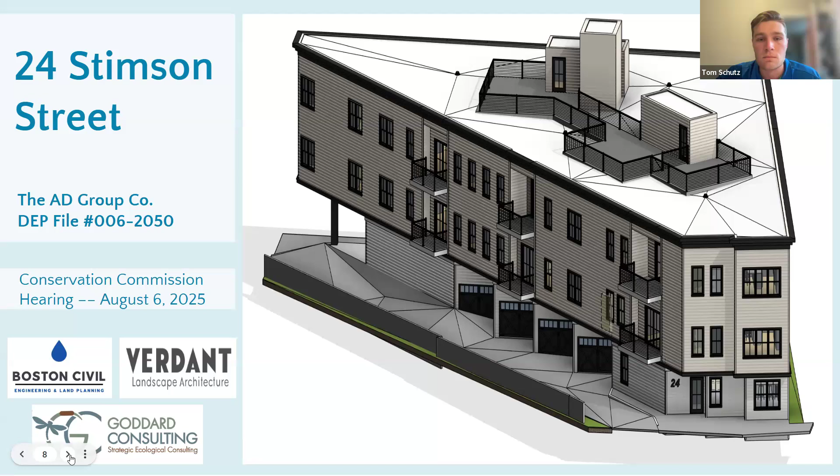Awesome, I think we can go to the next slide. Just a brief agenda here. So we'll start with some existing conditions, look at an ortho photo, describe the area, then we'll move into proposed conditions, the landscape plan, the building footprint and how it's evolved over time through several boards we've gone through. We'll look at the civil plans, the shadow study, and then close it up with any questions or follow-up discussion.

So here we're looking at an ortho photo of the locus site. The property boundary is highlighted in red.

This is a fully undeveloped lot that we're looking at, currently forested with mostly invasive trees consisting of Norway maple, and there's also a lot of invasive shrubs such as buckthorn and burning bush out there. It's bordered by commercial property and a parking lot to the west, residential properties to the north, condominium properties to the east, and then an isolated vegetated wetland to the south in an undeveloped lot.

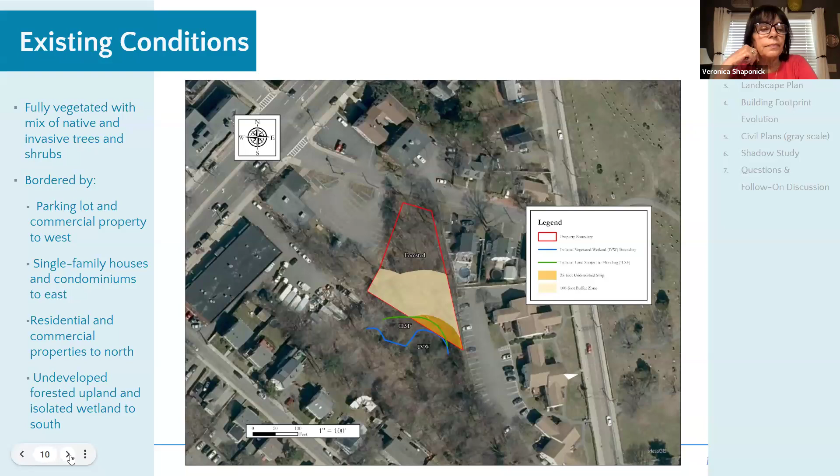So the existing wetland conditions on site consist of an isolated vegetated wetland, shown in the blue color. It inches its way onto the southern portion of the property, and it casts the 100-foot buffer zone, shown in tan, onto the locus site.

This buffer zone is only jurisdictional under the Boston Wetland Ordinance, and that would be the same for the isolated wetland. We're also going to have a 25-foot strip, which we'll see in the proposed conditions, that's going to be undisturbed.

The only Massachusetts Wetlands Protection Act jurisdictional resource area on the site is the isolated land subject to flooding, shown in the green line color, protruding onto the southern property boundary into that 25-foot zone. It's not located within any estimated or priority habitat for rare wildlife, not within an ACEC, outstanding resource water area, or a FEMA flood zone, and there are no certified or potential vernal pools on the locus site.

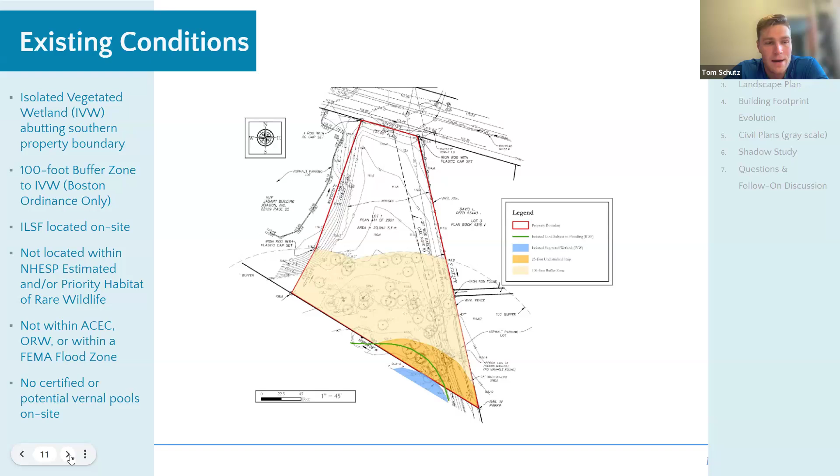We also have a tree survey for the commission. This was stamped and completed and submitted as part of the application. It's for the buffer zone only, as that is the only jurisdictional area for this commission. The trees that will be removed are noted on the site plan, and then also some additional trees within that 25-foot undisturbed strip are noted. Isolated wetland is shown down there to the south, and then Stimson Street to the north.

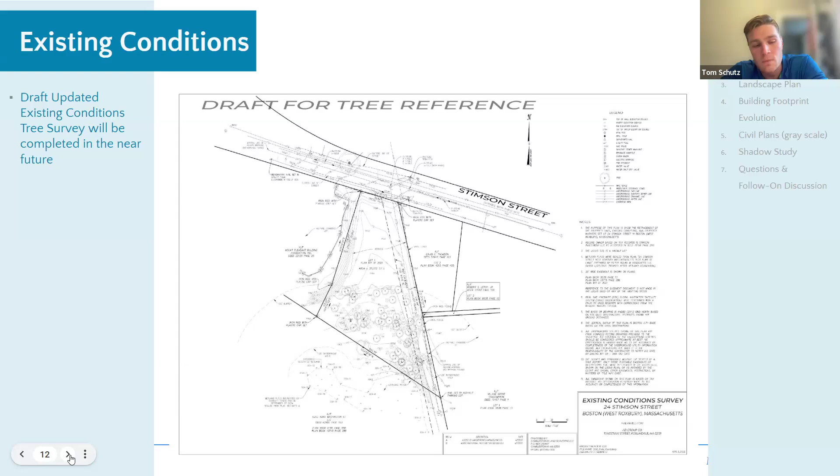So the applicant proposes the construction of an apartment building in the northwestern portion of the site, shown in the tan color, an associated access drive which will run down the eastern portion of the lot adjacent to the diagonal property boundary. It's also going to have a full stormwater management system which adheres to the stormwater management guidelines.

All the proposed work is within just the buffer zone to the isolated wetland. There's no work within 25 feet from the isolated wetland itself or within the isolated land subject to flooding.

As you can see, the tan is encompassing the bottom half of the proposed building and then also some of the parking, shown in the darker gray color. There's some spots you could see through the transparent tan color, but none of it is actually impacting the isolated wetland. We're also keeping that strip, the orange color, 25 feet from the wetland, to keep it undisturbed and forested to allow a natural buffer to that wetland itself.

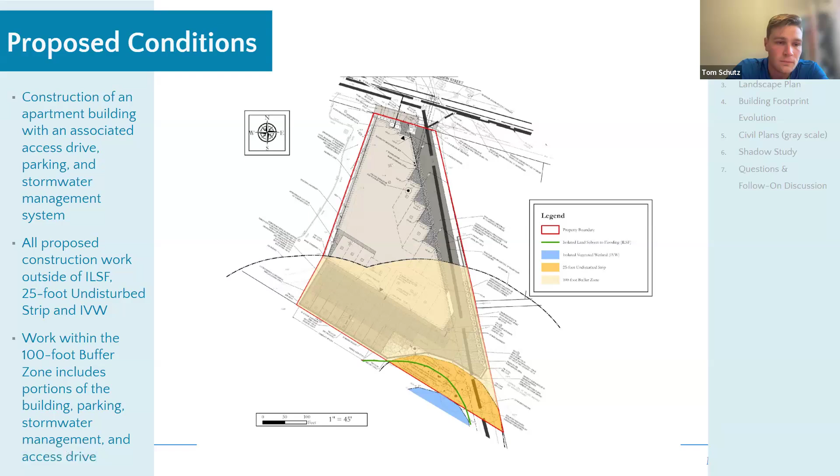This is showing the limit of work and where the actual construction pathway will take place. Access will be coming in from Stimson Street up where that hatch color is, and then down adjacent to it. The limit of work is shown in yellow on this site plan, and the limit of work is going to consist of filter sock, which is going to be secured with wooden stakes.

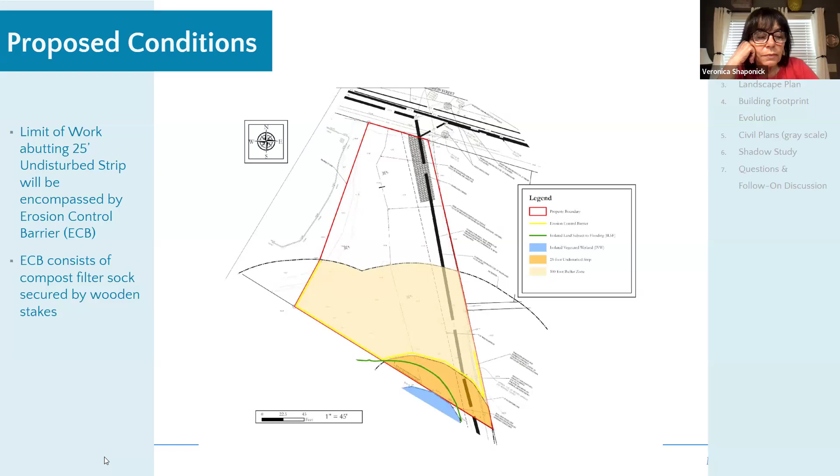Some more erosion related things. We have a stabilized construction entrance consisting of double washed stone. Again, our erosion control barriers consist of the compost filter sock with wooden stakes securing it in. The inlet for the stormwater management system is going to be protected with silt sacks, in the catch basins. And then there's also going to be a proposed sidewalk and driveway adjacent to the access drive.

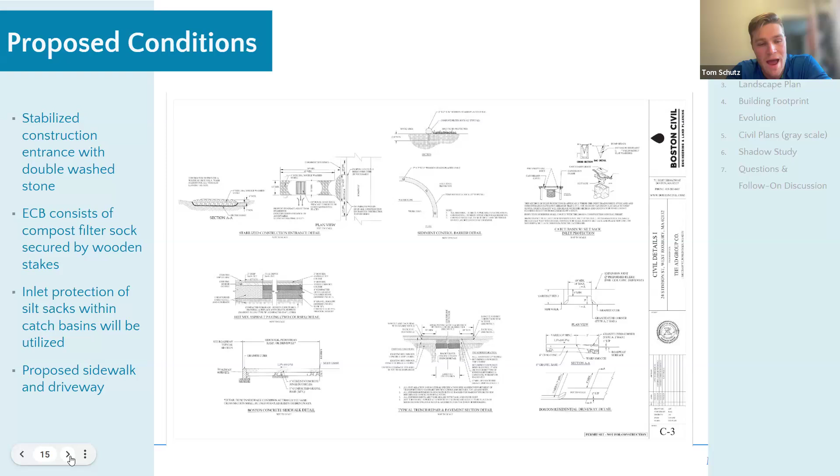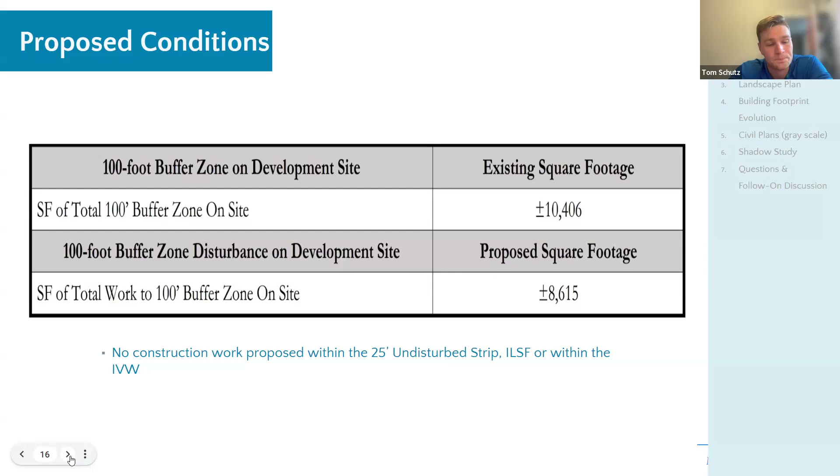I'll be turning over to Katya for the description of the landscaping plan. Thank you. Again, my name is Katya Podsiadlo with Verdant Landscape Architecture.

Landscape has pretty much three primary components. The top of the page on Stimson Street, we've developed a very welcoming front entry to the front door and lobby entrance for pedestrians. The entry would be highlighted with permeable pavers and flanked with durable varied plantings at the front door facing that Stimson Street.

Currently, there are no sidewalks on this side of Stimson Street, so we were proposing to add a public right-of-way, concrete paved sidewalk as well.

All the new fencing that we're proposing along this side and the rear property line, and outside the 25-foot resource area but on the retaining wall that I'll describe in a second, will be a metal picket fence.

Another thing to note, as was already described, is that the right-hand edge, or the eastern edge of the site, is the driveway access to the rear of the building where the parking is located. At that parking area in the rear, there's a turnaround in the right-hand corner colored green here, because it will be turf stone, with an image illustrating that style of permeable paver on the right that you can see. Next page, please.

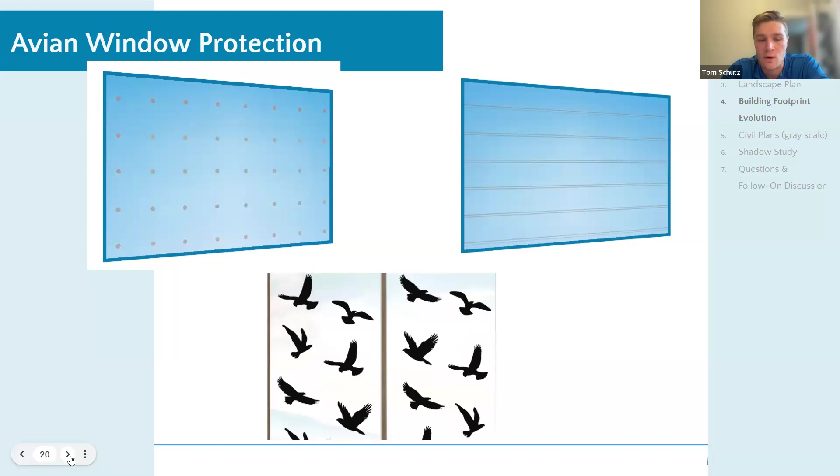All right, next slide.

Thank you. This is Eric Zackerson, architect for the project. Andres and the team asked me to give a little bit of a timeline of the different designs we've been through. The project was started in May 2022, and given its unique configuration, we immediately recognized the opportunity to design a project that would be zoning variance free, and we believed at the time it would be a rather quick and hopefully successful project.

We had a meeting with the BPDA in September 2022. There were 22 units shown, and 33 parking spaces. This was, as I said, a variance-free project. The BPDA asked us to make a few changes to increase the green space, and we met with them again in February 2023. We presented a project at that time that had 20 units and 30 parking spaces, again with no zoning variances.

The BPDA, as they were called at that time, asked us to take a step back and see if we could possibly take it down to 14 units and under 20,000 square feet, so that it would be taken out of the Article 80 process.

We were not given a great solid reason for that, but they were not comfortable with the number of parking spaces that the zoning code required.

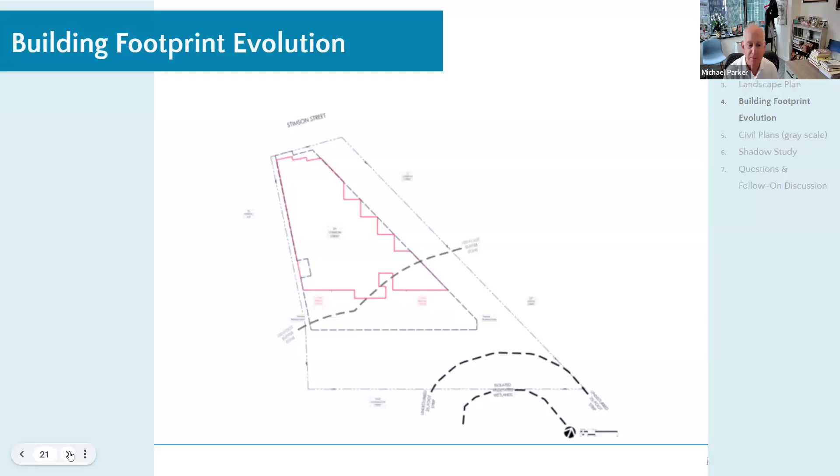Okay. That's very helpful. Who's next? Or is that it? Nope. There we go. I think you can actually jump to one more slide, yep, awesome.

Hi everyone, Kevin Queddy with Boston Civil. So this project, as described earlier, is just a wooded lot that we modeled in fair condition.

We had a time of concentration from a stormwater standpoint factored in because of the 3.5% grade over that length of travel. Additionally, to the west of the property there's a parking lot with a catch basin, but based on the topography going through there, we believe that may have overflowed or may not be in a condition that keeps the water on their property.

So essentially, what we did to address that, first off, was propose to improve the condition of that landscaping along there, to provide a swale, factoring a new sidewalk into the elevation of that swale. The remaining side of that swale would be an improvement to their property that the client is proposing to direct south, eventually making its way to the wetland.

From that point, that made the rate of runoff difficult to achieve. Because we're proposing to raise the grade at the back of the lot where that parking is, we're using 36 retained chambers that are concrete structures, utilized to raise the grade there, but also to prevent any lateral infiltration because those have concrete sidewalls.

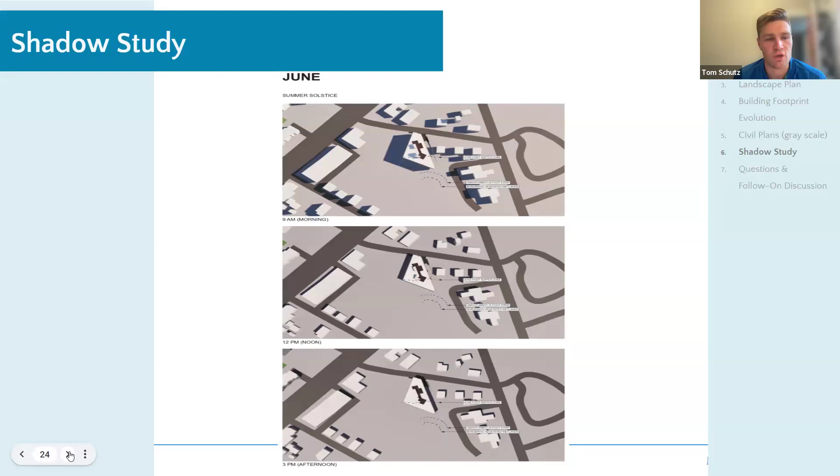Yeah, so we'll just finish up with the shadow study, as this was requested also on the site walk. These are just models of how the building is proposing and casting shadows onto the adjacent lots or onto the lot itself.

This you're looking at is June. This is the one time, at the 9 a.m. hour, where we're going to be casting a shadow towards the wetland itself. Every other shadow we see is going to be either contained on our lot or cast away from the wetland. The wetland is shown down there, you can see the two dotted lines. This is the one that is actually going to be casting towards it. So this is June, for anybody to note.

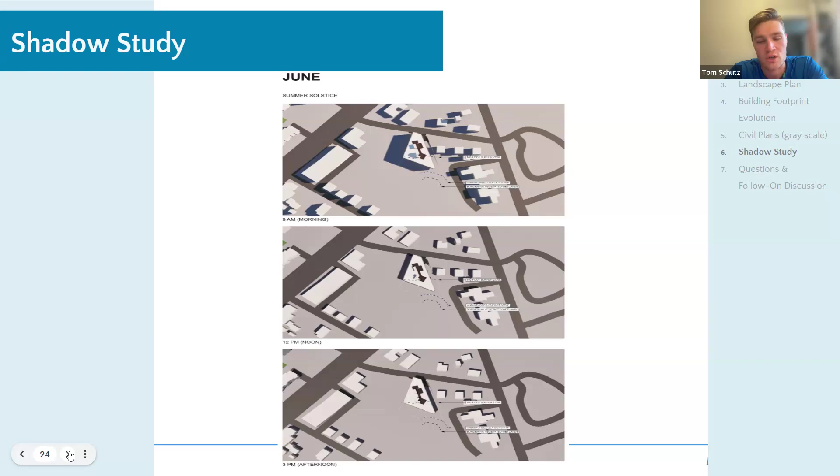Then we'll have two more slides that just show the next couple of months after that, through September and March, a longer shadow in the morning, but then pretty contained on our site through the rest of the day.

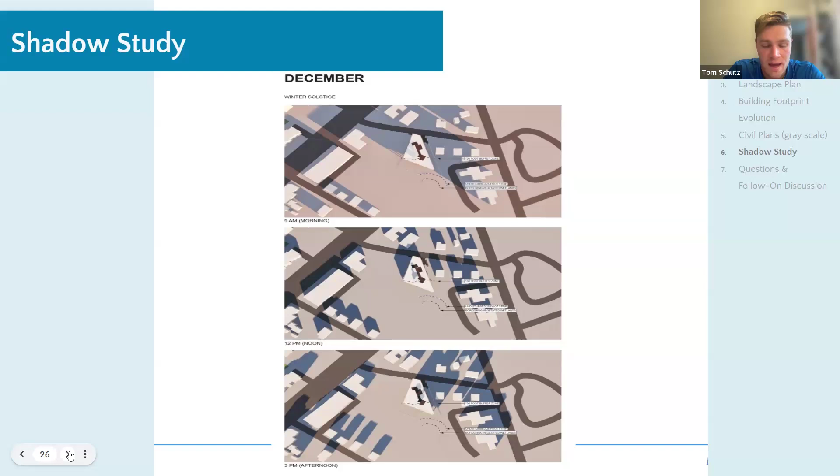All right, and now I'd like to open it up to the commission for any questions or comments for this project. Okay, great, thank you. So quite the odyssey there with the design of the building. And Andreas, you're probably happy you didn't live through all of those 3 years and you're just coming on board now. Certainly, Michael. I look stressed enough to have gone through all of that.

Okay, so I'm going to go to parking, and I know you've got your zoning attorney on the line here, and it sounds like a variance wasn't necessary. So I think we're going to be talking a lot about the parking and how close it is to the resource areas. Interesting that you didn't need a variance, and I guess the question is, if we wanted to get you to move those parking spaces further away from the resource areas, how would that get accomplished? And I would imagine that you don't want to accomplish that at the cost of getting a variance.

Yeah, that's correct. The only way it would be accomplished, moving the parking, would be eliminating the first unit and raising the building up. If we raise the building up, then now we trigger a zoning variance again. So we're kind of stuck between a rock and a hard place here.

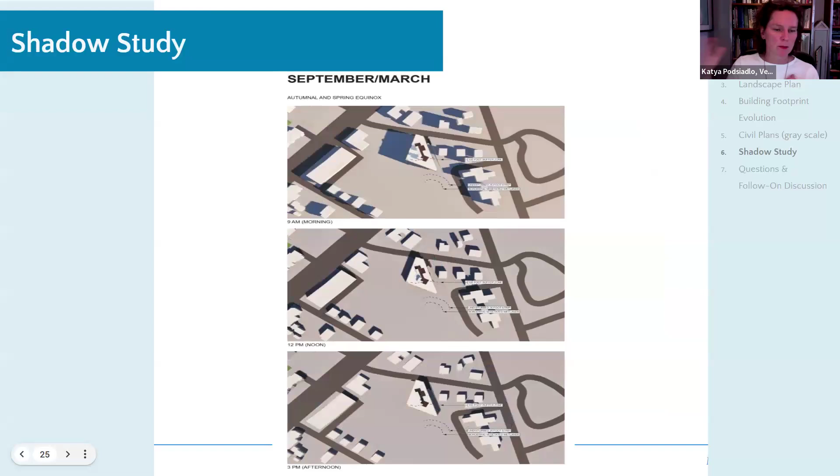Yeah, if we could bring up a plan, maybe there is a long strip of not-landscaped area along the driveway that's designated. At least on our landscape plan, we had pointed out snow storage, and I think it pairs up with the civil engineering plan. Along the right-hand side of the driveway, up until we show evergreen arborvitaes being planted, there's a strip that does not have landscaping, it's gravel. And then at the end of the site, in that little triangular landscape space where we are planting a tree, but with ground cover around it, we've labeled that as a snow storage area as well, as it can overflow if we can't fit it elsewhere.

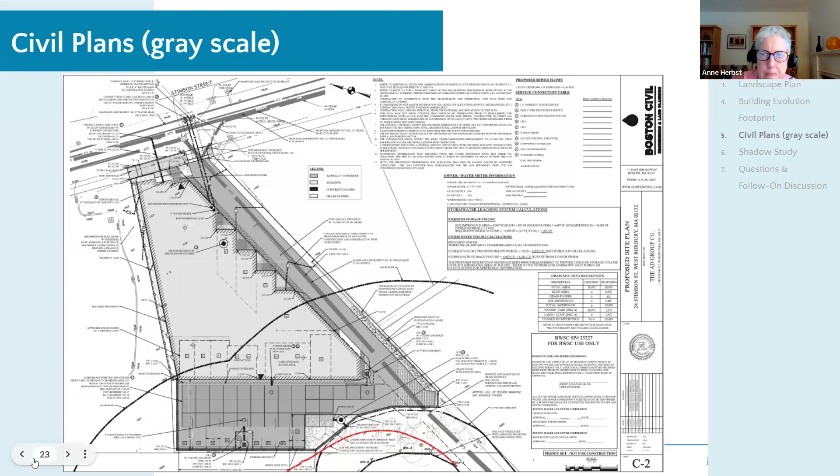But as described, there's also a place, a loading zone underneath, closer to the building. Could you show where the loading zone is? The landscaping plan actually illustrates it nicely. That would be helpful. Couple sheets before this, one more, two more there, one more before this. Might be the page right before this that has it labeled. There we go. I don't know how clear or high resolution this is, but there are some notes on it that point out snow storage along the right-hand side of the driveway.

Could I ask about that? How wide is that strip where you're wanting to store snow? About 4 feet, I believe.

I guess I just wonder about the practicality of that. I've never seen a strip like that suggested for snow storage. How would you even be able to move a truck sideways to put snow there? With the angled plow, for small events, storms, I believe, all events would just plow it off the side. But for dumping, like an actual excavator truck, the larger piles would be stored elsewhere.

And the elsewhere - there's a striped zone at the bottom right-hand corner of the building, to the right of those ADA parking spaces. There's another striped zone, that's a loading zone, and we could pile it up there. Below that, where our new light green tree circle is shown, there are ground covers in front of that tree that are low and can withstand snow storage being on top of them.

Is your loading zone where the trash is going to come out? No, that'll come out the side of the triangle. Okay, yeah.

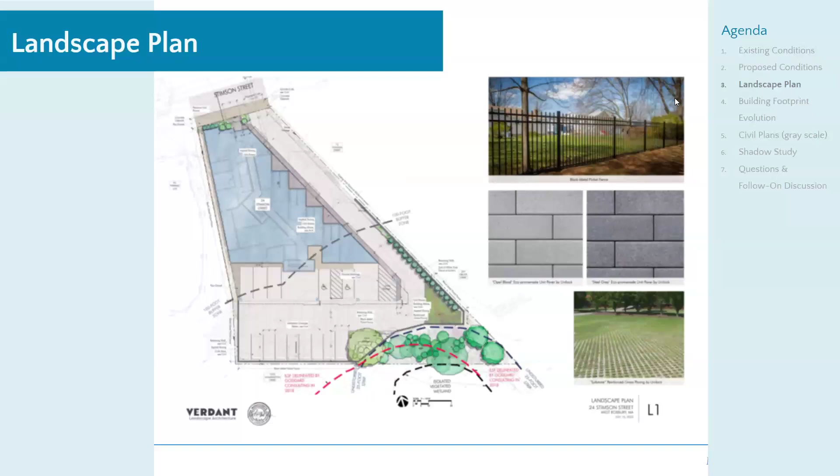Commissioner Shaponick, on here? Okay, I don't think I have more questions at this point.

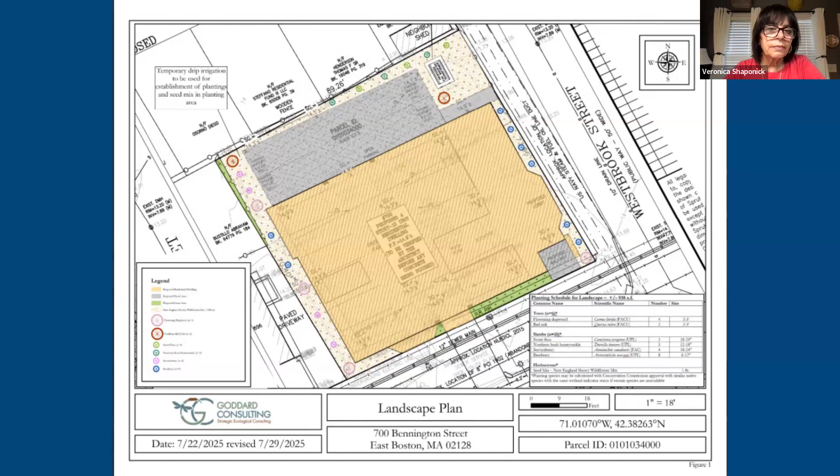I missed the previous presentation on this one. Just curious about the wildflower mix, what's the difference between that and the conservation mix? The wildflower mix is going to add more of the showy wildflowers you'd expect to see in a decorative area, but still native to New England, while the conservation seed mix is more grassy stuff. I see, great, thank you.

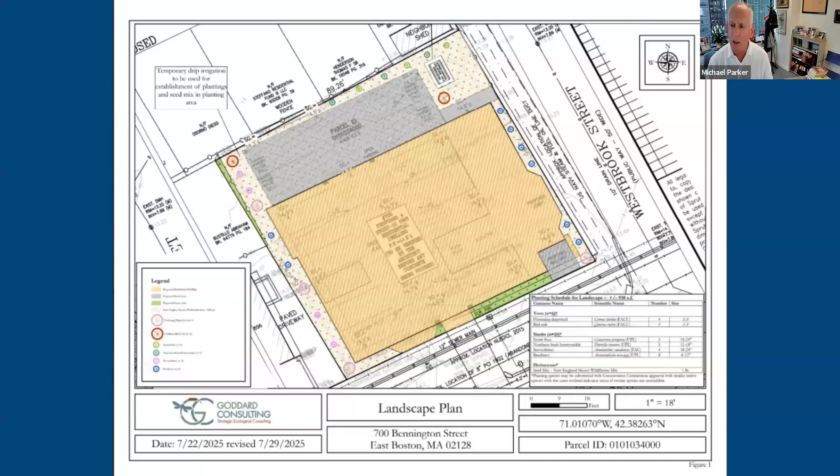On the flood vents, if they're required, it's something required on each wall, so at this point I don't see a need for a special condition. The applicant believes it's not required. If ISD in the end disagrees, then there will be flood vents. So I think my choice would be to leave it at that.

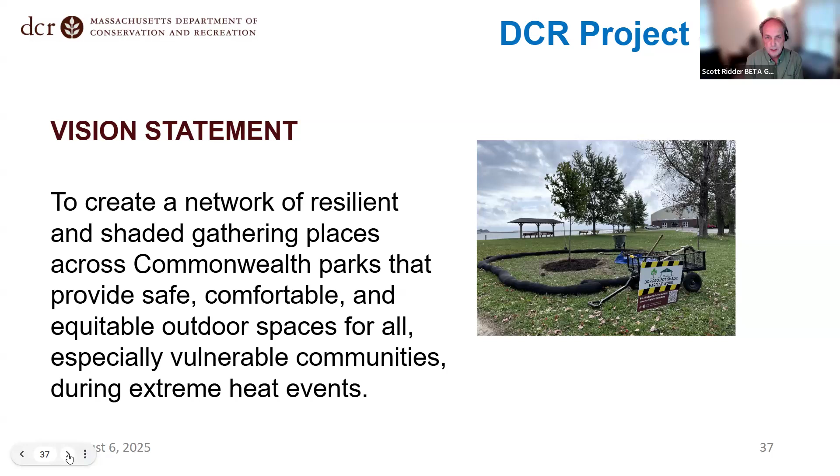This is one of the initial demonstration projects in the Boston area, which is pretty great. This picture shows that DCR has a great partnership with Tree Eastie, a volunteer urban forestry group. Last year they planted about 25 trees at this particular site, and this October they're going to plant another 25 or so as part of this project, which is one reason why we're here tonight. Next slide, please.

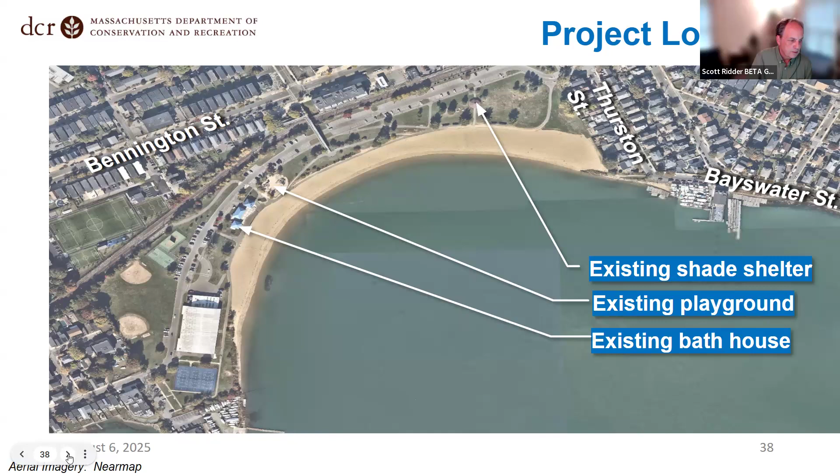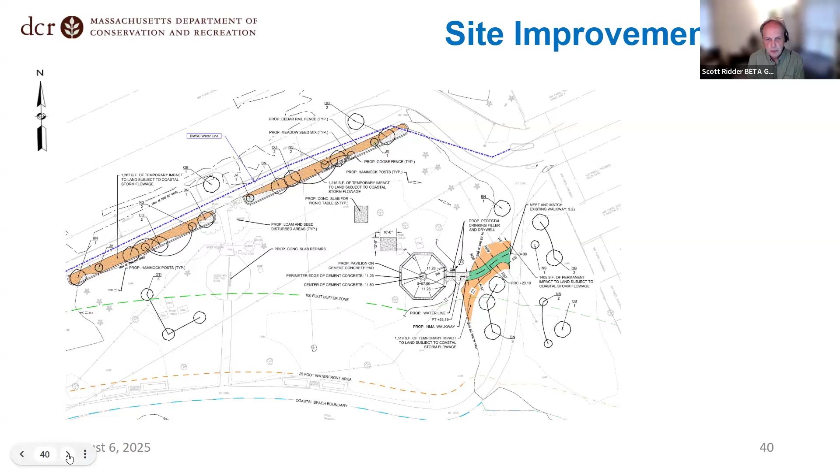Other opportunities for improving the site for park users, we're providing a couple additional new ADA accessible picnic tables. We're also doing some hammock posts. And again, all of this work is outside the buffer zone. We will be doing some tree planting within the buffer zone, and Elise can maybe talk about that now while we're on this slide.

Definitely, this slide is a good slide to show. So the project will involve work within land subject to coastal storm flowage, which is the coastal floodplain at the site, as well as work within the 100-foot buffer zone. So I can walk everybody through where those are located on this portion of the plan. At the south of the work area, we have the coastal beach, with a blue dashed line that is the coastal beach boundary. Then the 100-foot buffer zone from that coastal beach boundary is shown in the dashed green line. We also have the 25-foot local waterfront area in the dashed orange colored line. None of the project is proposing work within the waterfront area, so we'll be outside of that buffer zone.

As far as the land subject to coastal storm flowage, on this slide and the previous plan, there are a couple of shaded areas. The orange shaded areas are areas of temporary impact, associated with plantings, minor grading, and installation of the meadow or planting of the meadow seed areas. And in the green color, we have the permanent impact within the coastal floodplain, associated with the portion of the pathway that'll be connecting the existing on-site sidewalk or pathway to that newly proposed pavilion.

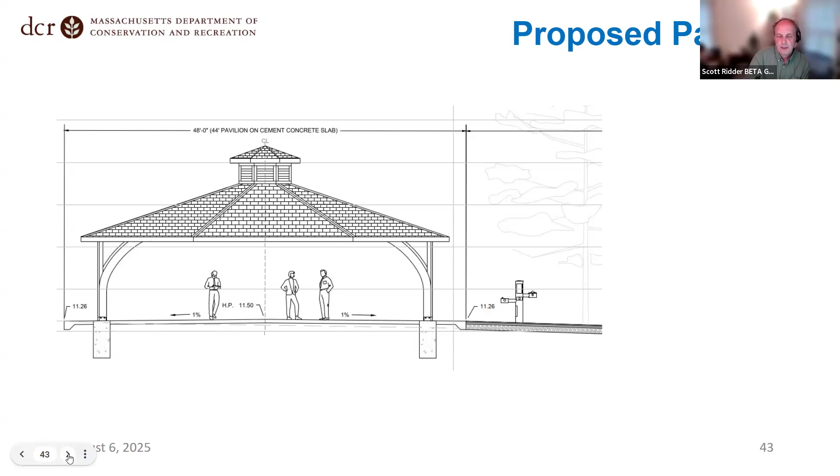Next slide, please. I'll ask Elise to jump back in to talk about some plantings. Absolutely—so for the plantings proposed for the project, they're all going to be native species. The plantings were chosen in consideration of site conditions and the coastal nature of the site, as well as the coastal zone management landscaping plant list, which includes some recommendations from that list.

And then there's going to be a meadow seed mix. That mix hasn't been finalized yet, but as Scott mentioned, it will be native grasses and perennials, with the goal of providing more pollinator habitat in line with DCR's pollinator initiative. Great, and that's it for our quick presentation.

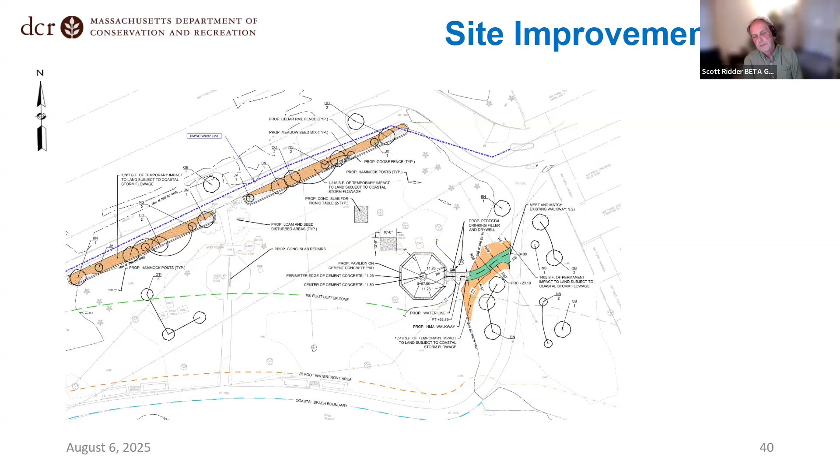So the existing gazebo, you see the three trees in the lower left? It's kind of a triangle shape. Yes, so just up and to the right, that's the existing one. Oh, I see, that's the existing shelter. And then about 100 feet or so to the east, to the right, that's the new shelter. So the light gray one is the existing one, and the bolder printing one is the new one. Exactly, and that has a small curvilinear walk that connects up to the existing pathway. I understand, on the right. And then there's the open lawn with the proposed trees, and the residences further to the east. I understand now, okay, okay.

Thank you, Jane. Leanne, you were next, and then Cindy.

Okay, so here's part of my issue with some of this. I think it's great that you guys are adding benches that are handicap accessible. I would like to see a few more ramps so handicapped people can get from the pathways to the water on the beach.

But my bigger issue is the existing gazebo has become party central. There's alcohol at will during the day and at night. They leave glass everywhere. It's become a place where people sleep. My concern is that by adding more of these things, we'll end up with more people thinking they can camp out and sleep all night on the beach.

My other concern is that planting some of these trees, especially near the big weeping willow, will create issues in the soil where that drain is. It works okay, but doesn't really take care of everything that pools in the pathways. So I'm wondering if any consideration has been given to what that large weeping willow does to the topography in that area.

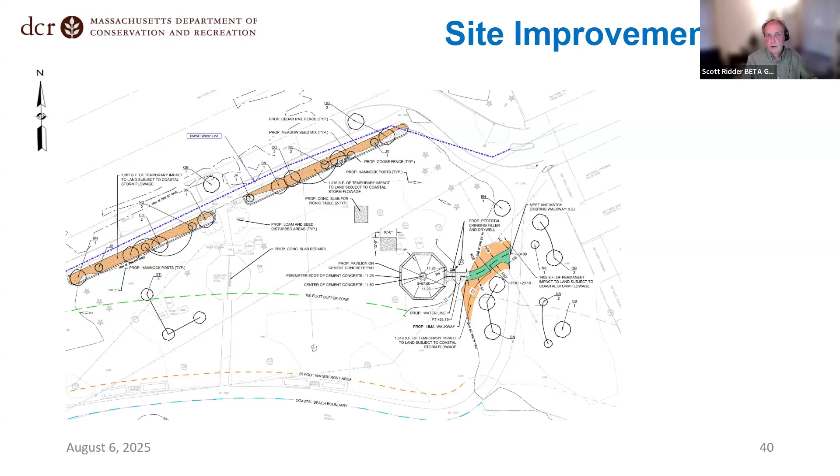We could certainly look at that drain a little bit. I'll talk to Jenna about that at DCR and see what we can do about it, if there really is a problem or what the problem might be.

You had made a comment earlier, and I shook my head, and I apologize, but you said we were all notified about a meeting in June, and we were not. I'm a direct abutter of this area, and my concern is that this is going to become a safety issue.

Although we put a whole bunch of money into this, what ends up happening is the kids run through it at night and start fires. We just had a fire in the house next door from somebody flicking a cigarette, and one of the tree limbs came down.

DCR has not exactly been great about fixing stuff that's breaking. We had a tree fall on DCR property that came down on the fence behind the house, and it's been three and a half years and the fence is still not fixed. My concern is that this is just going to be a place for more people to sleep overnight.

Understand, again, that's not within our jurisdiction, but a representative of DCR is on the call and I think they're hearing you. I'd suggest reaching out, and hopefully DCR would reach out to you about those concerns. Absolutely, I can share any contact information they'd like.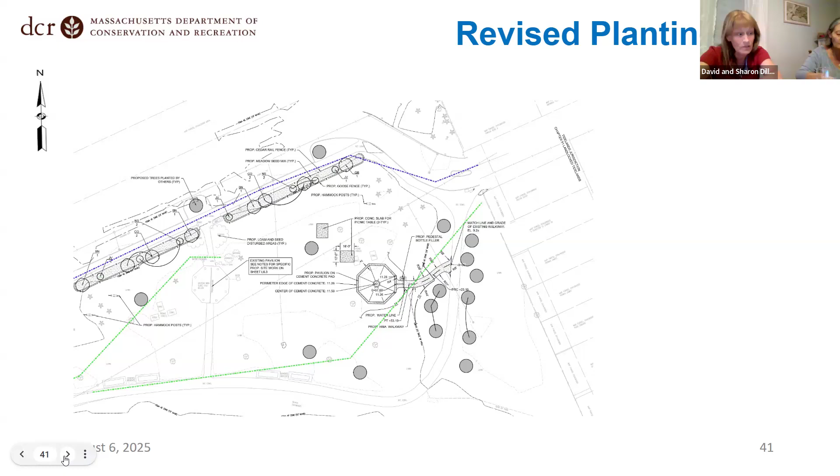Hi, this is David. My concern is Leanne's concern about the new gazebo. Now, I'm looking out at the beach right now at the original gazebo, and there is plenty of land to the left and beyond that gazebo going towards the bathhouse. Why would you not put the gazebo down there? Why are you putting it so close to our house? We have to listen to this noise every weekend from the people partying inside that gazebo, like Leanne said. Move it down towards the bathhouse.

Now, is the DCR person listening to this? Yep. Hello? Yep. So why can't you move it down? And the trees? Because all the trees are going to do is bring more people that are going to barbecue underneath them and more noise, and we're going to be suffering every weekend that it's hot.

Okay. And by the way, do any of you people have a house on the water? Or have a water view? Do you? I'm not sure it's relevant. No, because if it is relevant, I bought this house 35 years ago for the one purpose of seeing the beach. And now you're going to take it away with trees. When you could put them down the other end near the ice skate. Okay. Has anybody considered that?

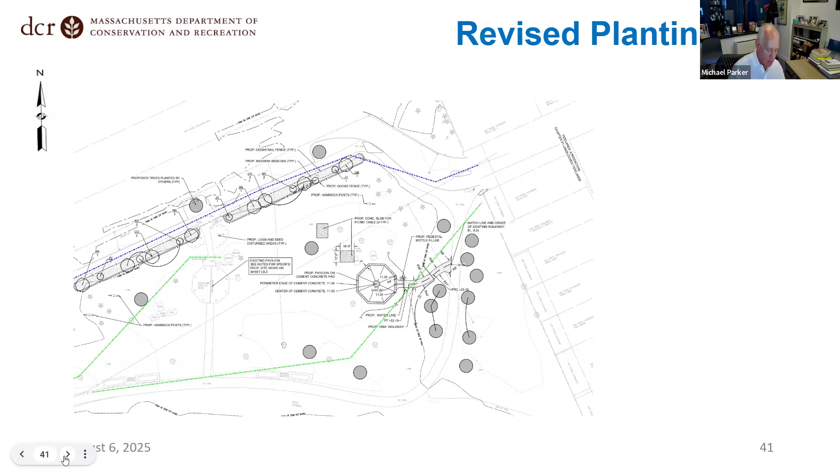Who's here on behalf of the proponent? Hi, this is Brad Washburn with Massport. With me tonight we have Payson Whitney from TRC, who's going to go over a few slides. Payson, myself, and Chris Bush are here to answer any questions. Great, okay, the floor is yours.

Thank you, commissioners. We actually have 2 separate notices of intent here. This is the first one: the North Service Area Optimization Project at Logan Airport. If we go to the next slide.

So this is an overview. The North Service Area is in the northwest corner of the airfield. It's basically just due north of the new Terminal E, and the fuel tanks and the economy parking, for those familiar with Logan. You can go to the next slide.

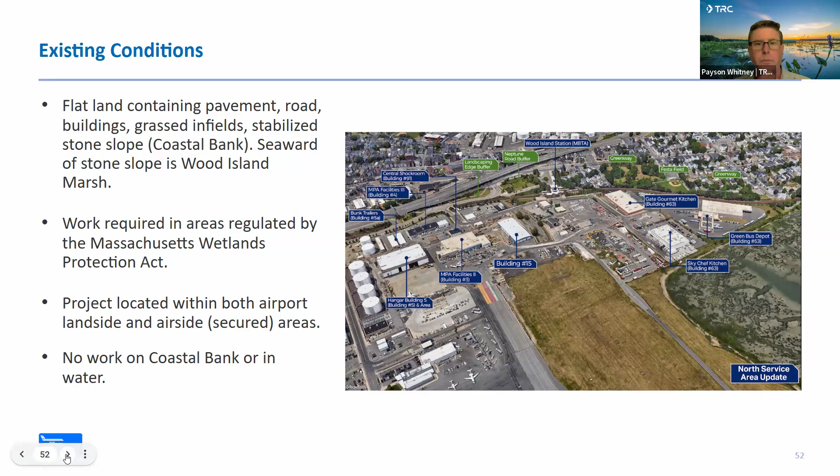In terms of the wetland resource areas, on the left-hand side, the teal shaded area is an area of land subject to coastal storm flowage, labeled B. That flooding source is actually Boston Inner Harbor, in the area of Decatur Street and up through Marginal Street and up the T tracks there.

On the right-hand side, we have the Wood Island Marsh, as I mentioned before, which we've indicated with some of the purple shading as well. That is also land subject to coastal storm flowage, but that's a separate flooding source, the Orient Heights Bay, Wood Island Marsh area. We have coast on that side of the site as well.

We have a coastal bank delineated as a light blue line, or the buffer zone, the coastal bank, sorry, in the light blue line. The coastal bank is a little bit hard to see, but it really follows that white dash line in the blue line right along the Wood Island Marsh shoreline. We can go to the next slide.

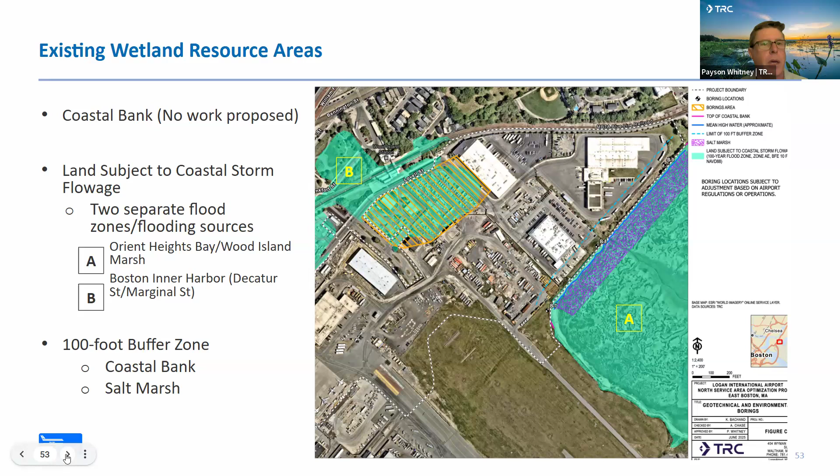So the major elements of the optimization project is the large vehicle maintenance facility. That's the big building in the middle of the image here, designed to store the large snow plows and snow melting equipment that gets used. There are a lot of snow plows, as you can imagine. It takes a large number of equipment to keep the airfield operational during snow events.

The green bus depot is actually going to be repurposed, and it's going to become a fleet storage and maintenance facility. And then along the Wood Island shoreline, Massport is committed to constructing an earthen resiliency berm. That was a solution that came out of the city's coastal resiliency solutions report back in 2022, so Massport has agreed to take that on.

The vehicle service road is the light gray line that you're seeing in the foreground of this photo. There are also some ancillary buildings being constructed, and some site improvements, including the fueling island and the relocation of the SIDA wall. SIDA stands for Security Identification Display Area - that's the blast wall that denotes the land side versus the secured air side of the airfield.

We can go to the next slide.

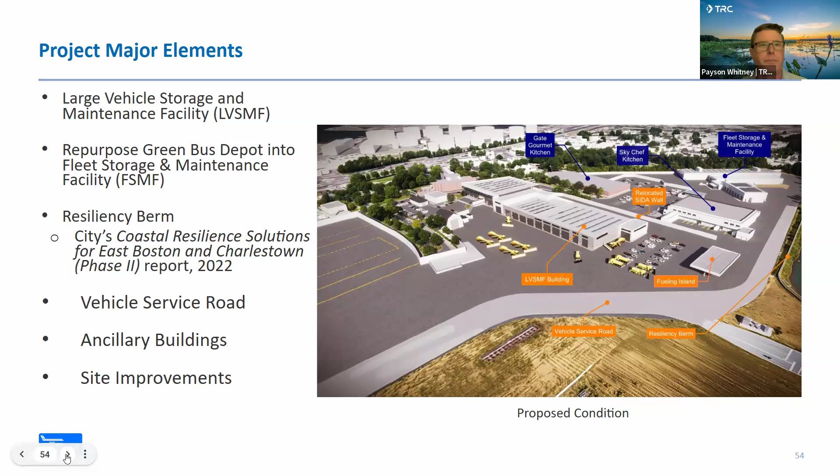So we have a number of jurisdictional activities. While the project is very large, about 49 acres of the North Service area, there's only a portion of it that is within jurisdiction of the Wetlands Protection Act. The activities that we have are listed here - like we said, they're in the buffer zone or in land subject to coastal storm flowage.

We have exploratory borings that we're doing. Borings are exempt, but the access actually is through a paved portion of land subject to coastal storm flowage over by Lovell Street. The resiliency berm, the service road, and a lot of the things that I just described are in here.

There are some buildings coming down as well on the more western side of the North Service area, to facilitate the new large vehicle building. Some of the ancillary buildings are supporting FAA operations at the site that help maintain the airfield. There's a sand shed and a salt shed that will also be relocated into new facilities there, and obviously there's underground conduits and utilities that will feed a lot of these buildings.

We can go to the next slide.

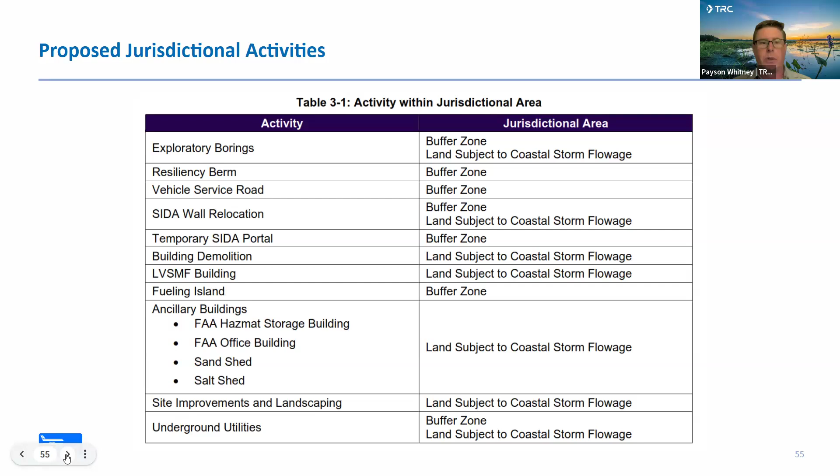These are two of the sections that are in the plans we submitted showing the resiliency berm. In the left-hand one, you can see the red dash line is the existing ground. We've noted where the top of bank is, and the toe of the slope is going to be set back approximately 2 to 3 feet beyond landward of that. Then the berm will be built up from there. On top of the berm, there will be a chain link fence, similar to the one along that edge of the airfield as it stands now.

The section on the right-hand side shows where the berm will actually be butting up against the vehicle service road. Same condition, the slope changes a little bit in terms of the berm, and then it butts right up against the road on that side. On the water side of the berm, it's going to be an armor stone construction to help resist any incidental wave attack that may come in large storms. On the crest and the landward side, it would be vegetated with a grass mix, and we provided all the details on the mixes in the notice of intent.

We go to the next slide.

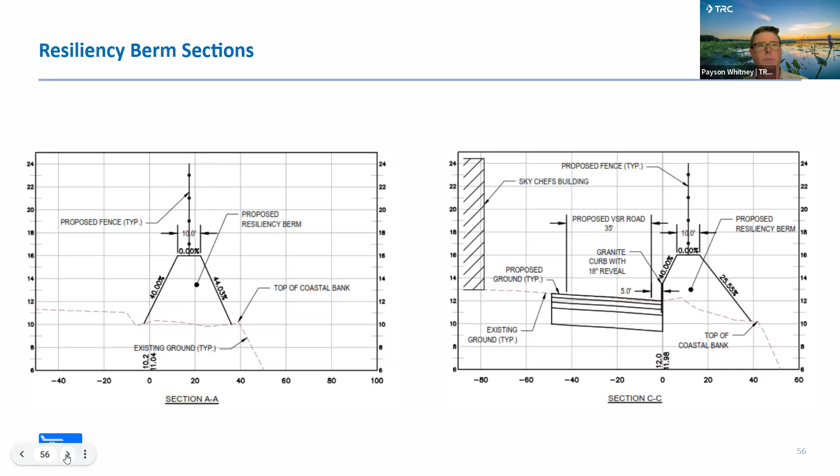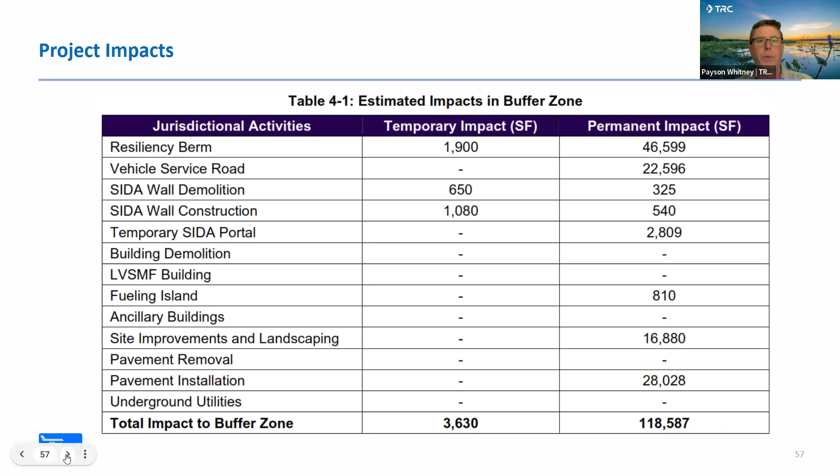We'll go to the next slide. Shows the land subject to coastal storm flowage. Obviously, this includes the two areas cumulatively, and most of these impacts are on the western side of the site.

That's about 230,000 square feet. Again, all areas that are developed. We'll go to the next slide.

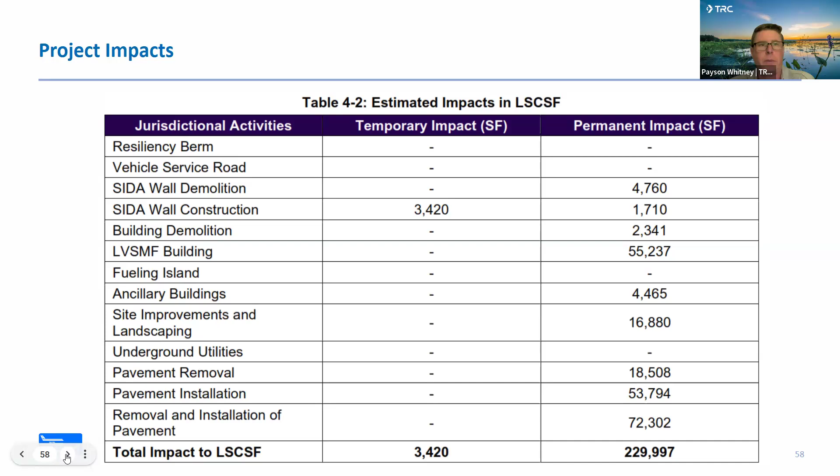We highlighted this more in the NOI, but the performance standards for the coastal bank and for the salt marsh have all been met. We are not working within these resource areas, only within their buffer zones as part of this project. The project protects the interest of land subject to coastal storm flowage. The one from Decatur Street, we're at the extreme landward end of it. A lot of that portion of the North Service area is already protected by the blast wall, so the ability for floodwaters to get in there is somewhat limited, and there will continue to be a blast wall in that area.

To the extent practical, it is a redevelopment project. The stormwater design has been designed to meet the stormwater standards. I believe that's it for this presentation for the North Service area.

I don't know if the commission wants to handle this one separately from the West Outfall project and go through the process one at a time, or however the commission wants to do it. Yeah, we have to open up two separate hearings. That's what I figured. Yep. Yeah, we appreciate it though.

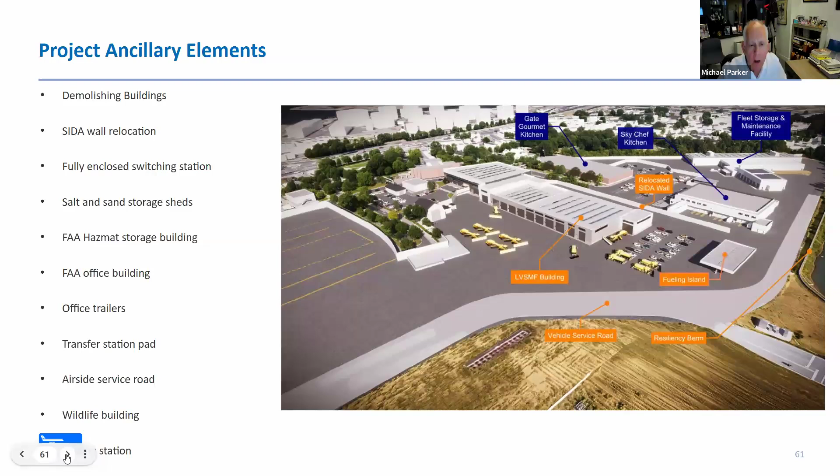I will let others comment, I know there'll be some comments here. The only comment I want to make is on jurisdictional issues that we discussed at the last hearing with Brad and Chris, I believe. I think Chet might have been on the call as well. I know there have been discussions going on, and hopefully we'll be resolving those issues in the very near term. With that, I don't really have any questions on this, so I'll turn it over to Elena.

I didn't have any questions on this either, but I think the thing we noted was that we'd recommend a condition that once the number and location of borings are finalized, those would be submitted to commission staff for review and approval before construction commences. I assume that's okay with Massport? Yeah, that's good. That's fine.

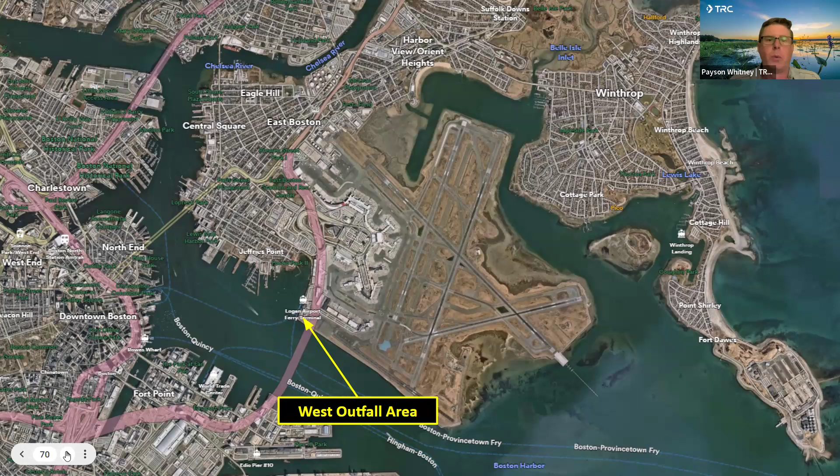So this is concerning the west outfall area of the airport, almost exactly due south of where we were just talking about. Right near, if we go to the next slide, it's a little more zoomed in. This area is actually just due south of the Hyatt hotel that's out there.

So this project is what we've entitled Enabling Works. The overall objective of this project is to move the SIDA wall to the west to increase the airside real estate, for lack of a better word, in this part of the airport, to enable the North Service Area project.

At the North Service Area currently, there's a lot of mobile equipment out there, a lot of office trailers in that area that need to be moved to facilitate the project we just talked about and you just approved. So a lot of this equipment is going to be moved down to this area of the airport. There's some work that needs to be done, and part of it is within your jurisdiction. We can go to the next slide.

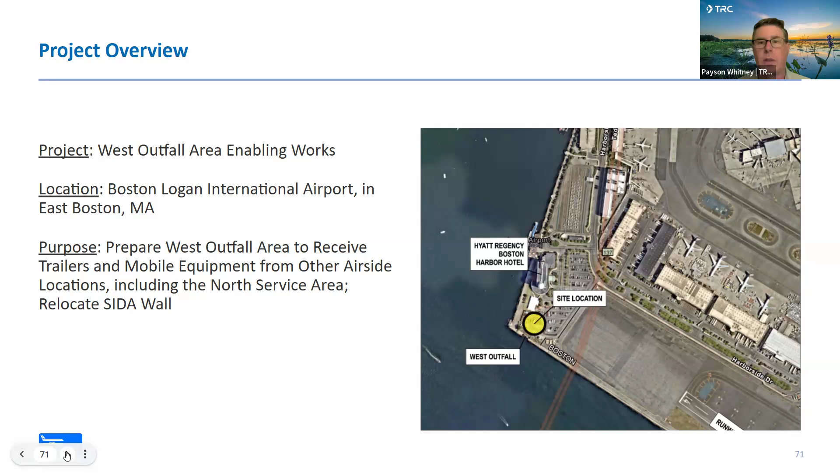Some equipment is currently stored there, but from the landscapers that work at Logan. And obviously it's right on the water, fronted by the coastal revetment that runs along that whole shoreline, along the Logan Airport shoreline. So again, areas within wetlands jurisdiction, but we're not doing any work in the water or on the coastal bank. We can go to the next slide.

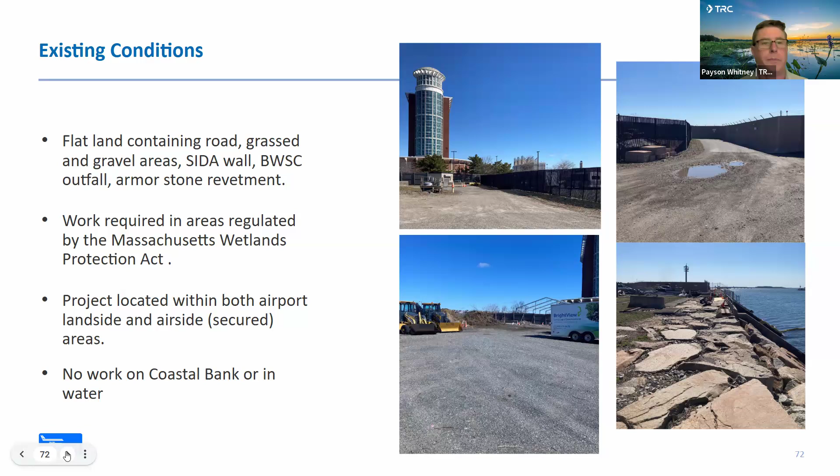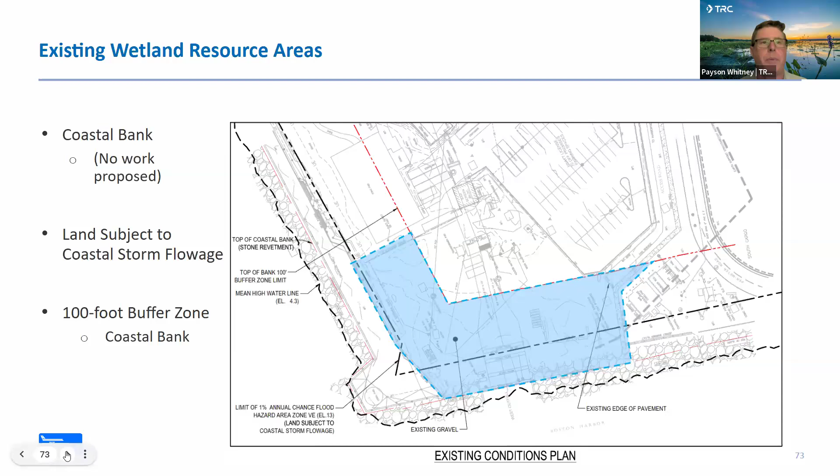So the existing wetland resource areas — we actually have the coastal bank. The blue area is the area within your jurisdiction. We've got the 100-foot buffer zone as well, and there's some land subject to coastal storm flowage, which goes really up to the top of the existing revetment that's there. We go to the next slide.

So what is being done is a new water line will be put in to service these trailers that are going to be moved down there. The design has been to move the trailers and keep the trailers out of the buffer zone.

And then the work that's within the buffer zone is really maintaining the existing gravel area. There may be some grading in there to firm up some of the slight grades that are out there. And then really it's parking, lay down of some equipment and some parking in there.

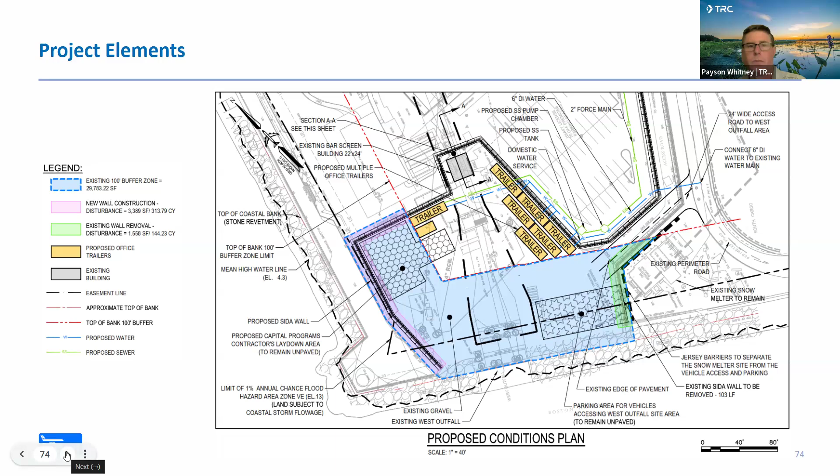So again, in terms of impacts, we've got about 5,000 square feet just under of impact, and that's largely related to removal of the SIDA wall and installation of the new SIDA wall within the buffer zone.

Land subject to coastal storm flowage, again, we've got just along that westerly edge there is where that new SIDA wall is going, and it kind of follows where that land subject to coastal storm flowage line is. And again, zero impact to the coastal bank, the revetment that's out there.

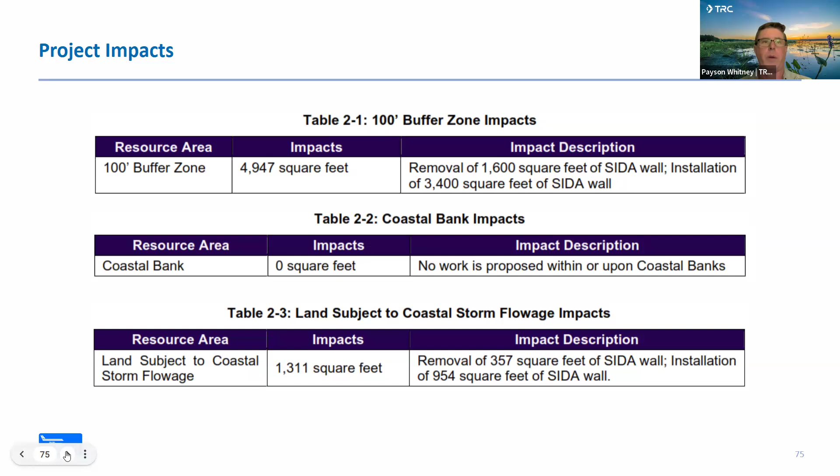Go to the next slide.

And again, we comply with the performance standards for coastal bank. We're only working within the buffer zone at this area, and we did purposely design it so we minimized any structures that were within that buffer zone, and then we meet the interest of land subject to coastal storm flowage. And again, it's a redevelopment project, so we met the stormwater standards to the extent practical.

And I think that's the last slide we have, Elena.

Okay, thank you. The snow melter area, how's that runoff handled? And are there any chemicals? There must be chemicals involved here because you probably have to do it fast.

I believe it goes, and Chris and Brad, you may know, I believe it goes through the stormwater system for the airport. Is that correct? In that area? I believe it's just a heating component that melts the snow. And because a lot of the snow is coming from the airfield, there can't be any sand, salt, or chemicals, is my understanding, but we can get you more information on that.

Oh, it's interesting. Because when they de-ice the planes, I just assumed that they use chemicals. Yeah, I mean, I think there's a separate de-icing pad, but that is a separate operation and area altogether than the snow melters.

Okay. It feels strange that the snow could get from the airfield over there without chemicals of some sort being in the snow, even if it was salt. Yeah, that area is actually pretty far remote from the terminals where the planes would be de-iced. It's at the end of, I forget the runway numbers, the short runway at Logan, and it's at the far end of that area.

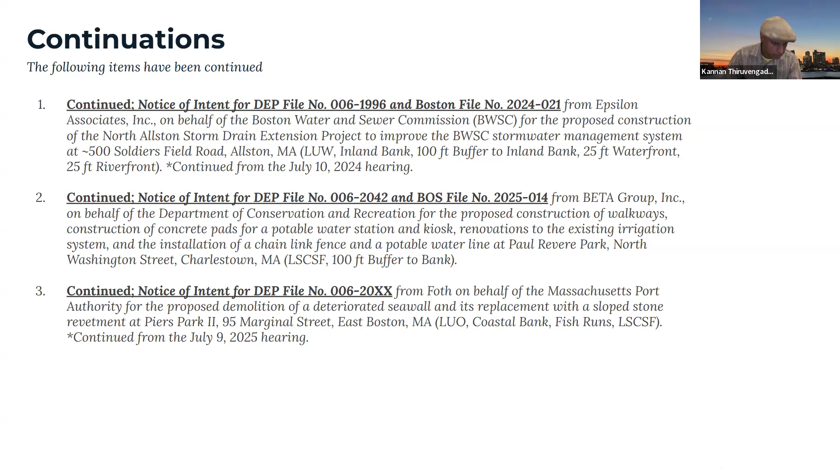Could I get a motion to close that hearing? So moved. Second. Thank you. Commissioner Sullivan, Aye. Commissioner Linay, Aye. Commissioner Wilson, Aye. Commissioner Conan: I'm gonna abstain from this one also. Commissioner S.S. Smargiassi, Aye. Commissioner Herbst, Aye. And I vote aye. That carries 6 ayes, 1 abstention.

Okay, thank you, Elena. Commissioner Sullivan, you're the one who's supposed to make sure that I call for the issue of the order of conditions and close the hearing. I'm not sure what happened. Well, I was being kind, that's all. Don't be kind. Okay, what happens? I have to go, I'll be back. I'll be myself then, okay. Yeah, but act like someone is blocking your easement. Well, just wait till they try to do it. I mean, you know how it is. I already wrote myself two notes. That's what I've been doing right now. The attorneys and everything, so.

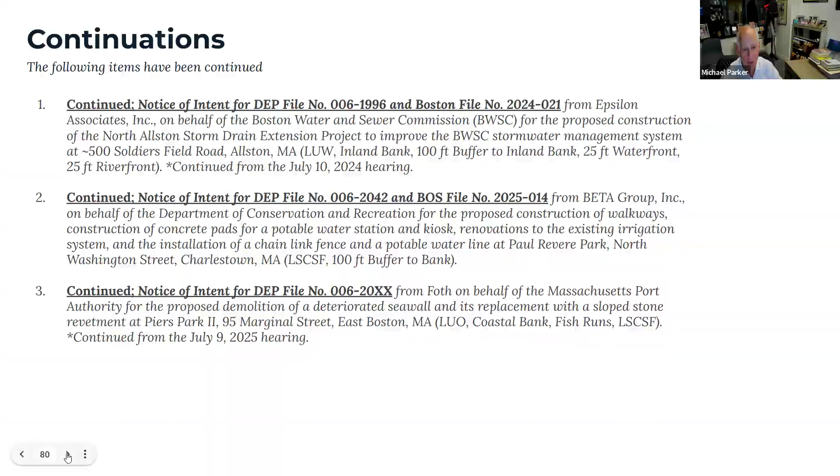Okay, so now we're into our regular hearing. The first item on the agenda is a certificate of compliance request for DEP file number 0061712 and Boston file number 2020-011 from LEC Environmental on behalf of the Allendale Condo Trust for the vegetation restoration and invasive species management located at 200 to 232 Allendale Street in Roslindale. Resource areas: inland bank, bordering vegetated wetlands, waterfront area, 100-foot buffer to inland bank, and 100-foot buffer to bordering vegetated wetlands. Elena, what do you have on this?

Yes, so just to remind everybody, this was originally the restoration work — excuse me, I think the late hour is getting to my sentences. The commission had requested a restoration plan at Allendale Condos after there had been some unauthorized clearing of vegetation along the banks of the pond. They have now completed their restoration work. They've completed the required monitoring. And as a result, we conducted a site visit and worked with them to put together some additional perpetual maintenance conditions, which we would recommend including in a motion to issue the certificate of compliance.

We have the standard perpetual maintenance conditions that we see on a lot of our orders. The additional perpetual maintenance conditions were specifically to allow for limited amounts of pruning to ensure the continued health of the bank after the restoration work is complete, and to also allow for some additional invasives management.

I know there's specifically one patch of Japanese knotweed that's estimated to be about 95% taken care of, but it might need one more treatment, and this would allow for additional treatment to be done as needed. There had also been some concerns raised by residents about their view shed.